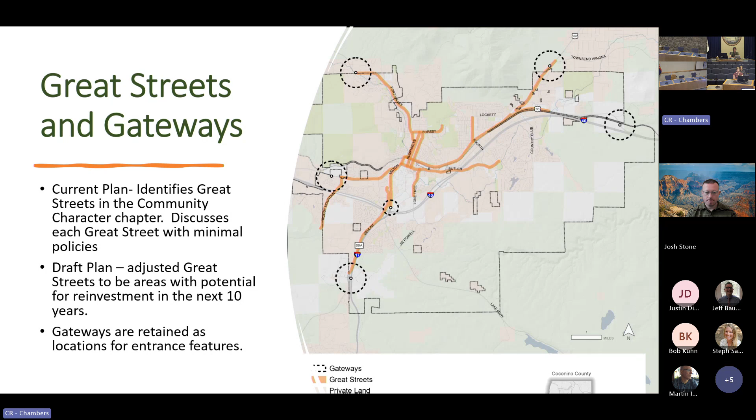When it applies to development cases, that's when not only does the work of transportation staff rely on the TIA, but discretionary decisions like rezonings and annexations can also include a look at the future growth of the road network and ask, are you meeting our connectivity expectations? Are you realigning roads, or at least meeting at a minimum what we're looking for going forward? We don't hold future route planning to the exact line, but to trying to get connectivity in a network similar enough that meets the same level of function.

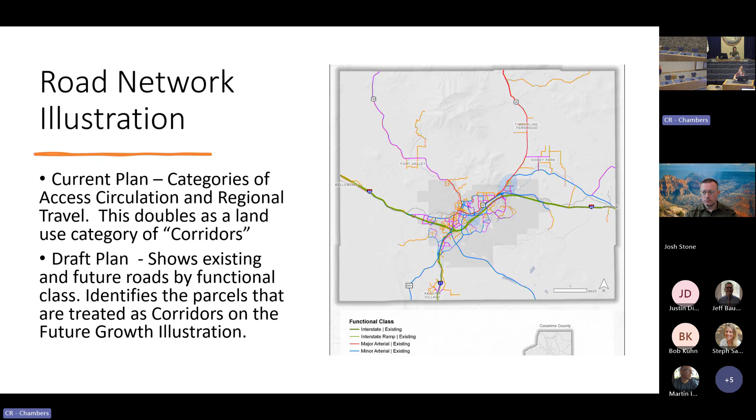So looking at the draft plan for future use, how is future land use and changes in volumes or use of streets accounted for in the plan? We did what we call exploratory scenario planning. Our future growth illustration is based on what we called scenario E, and there was modeling associated with all of our scenarios.

The scenarios, we don't go back and model this whole map because it doesn't all come online at once. It'll come online at different times and different places. But we did model a scenario where we took the amount of expected growth between now and 2045 and applied it in a rough way to the map, testing what if it grows like this, or like this. We tested where we would get the most return, especially on vehicle miles traveled. That was a real consideration on the land use side, is which of those scenarios helped us meet our active transportation goals, reduce VMT for the carbon neutrality plan, and also support shorter commute times.

One thing we found in exploratory scenario planning is if we kept developing the way we have been, and not allowing for more infill development, we would continue to push people to longer and longer commutes outside of the region, a trend we've already seen get started. People are buying homes in Williams and Winslow and then commuting into Flagstaff, which was not a common situation 10 or 15 years ago. That trend could continue to the point where over 50% of our workforce is in-commuting, if we are not thoughtful about the land use practices within the city limits.

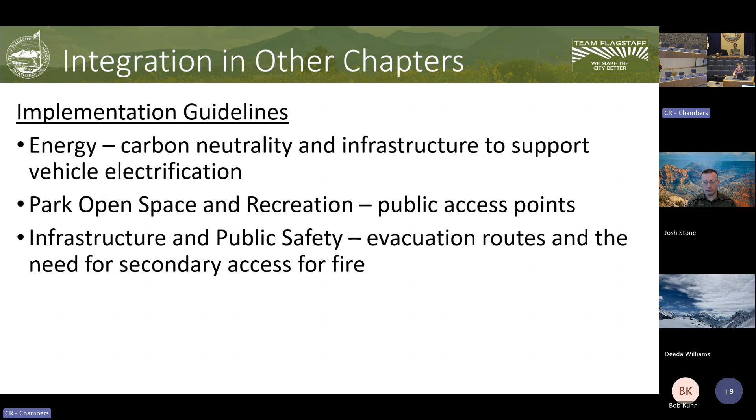So what's going to happen during the 60-day review? The 60-day review is going to have these opportunities for public engagement. That's all going to get wrapped up in December. And then staff will be analyzing and incorporating the public comments and the feedback we've gotten from testing that we're hoping to do with several different departments.

We'll have the opportunity to reconvene the committee if there are complex issues, but we also might elect to bring those back to commissions if it's not integrated across many different topics. If it's really just a transportation issue, we might be back in January or February with an issue we'd like your help resolving.

Legal is going to have to complete another final legal review, because certainly we wouldn't accept public comments if we weren't willing to make some changes. So that's part of this process.

And then the document goes to a retreat of the Board of Supervisors, City Council, and the Planning and Zoning Commissioners from the city and county. This is what often gets called the citizen review session.

But the plan is so big and so comprehensive that in the past they would have 12 or 13 work sessions in a row, and that's a big time commitment. It's also a hard way to look at the document—if you're not sitting down and really looking at it in a short period of time, people kind of lose the thread. The chapter by chapter reviews were sometimes difficult for the committee, and they were much more concise when we did the whole document review. We were able to get through that pretty quickly.

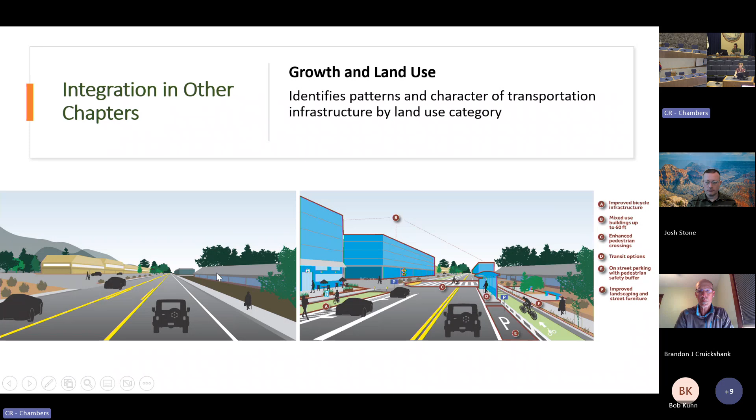Okay, I'm not hearing any. So I guess, Sarah, what would you like from us? Just specific comments? Do you want us to more formally review the plan in more detail, or?

I think what we'd like you to do is review the plan in detail when it's sent out on October 20th. As a commission, previously when we came around, I said don't come up with a formal commission comment, just give me your individual comments. But this is actually the time to come up with a formal commission comment. So it would be advisable if you wanted to see me back in December, or agendize it for your next meeting, to put together a commission-approved comment to send in. We'll ask the same of the bike advisory and the pedestrian advisory committee.

That sounds pretty reasonable to add that to our next agenda in December. Does that sound good to everybody else? We'll try to make a note to remind everybody a couple weeks ahead of time to actually read through the document, so we're not all trying to plow through it on Tuesday evening. I'll ask Jeff to send out our notice when we send out the 60-day review start. Yeah, that'd be great, and a mid-November reminder. Thank you, Jeff.

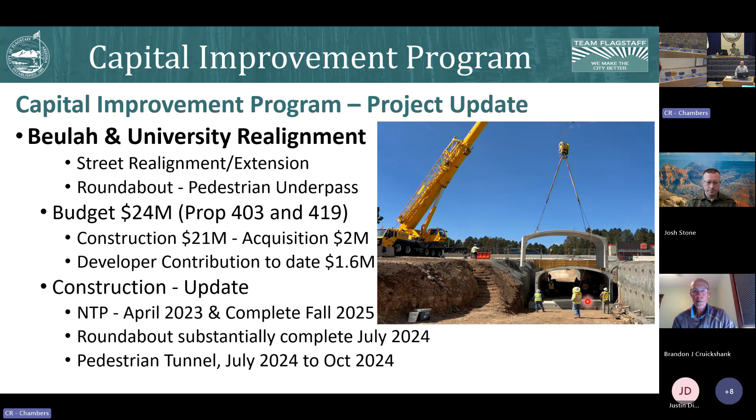Then the roundabout on the west side, which we call phase 1, is substantially complete as of July. They're still working on some landscaping, minor improvements, and upgrades to get it ready. But right now there's no traffic on that road until they get everything complete, and towards next summer is when they should start looking at opening that portion on the west side. So that's Beulah University. As always, if you have a question, raise your hand or stop me and we can talk about it.

The next project is John Wesley Powell. This again is out of Proposition 419. It's an extension of a road from the Butler and 4th intersection going south, then connecting to where it currently ends by Pine Canyon subdivision.

This project is a joint venture, or a shared responsibility. 60% is on the property owners in the area and then 40% is for the city. We've talked about 45 million, but that's an estimate from a while back, and we're moving into a design process.

We're currently working on the design. We'll probably keep working on that through the early parts of next year, and then maybe some construction later next year, and possibly going for 2 more seasons after that.

The good thing is on October 8th, next Tuesday, we will have a council update, so the team will be in front of the council to give an update on this project. One thing I failed to mention is on the Beulah University project, we will also be in front of council on the 8th for an update, so you'll get more in-depth information from the team for both of these projects.

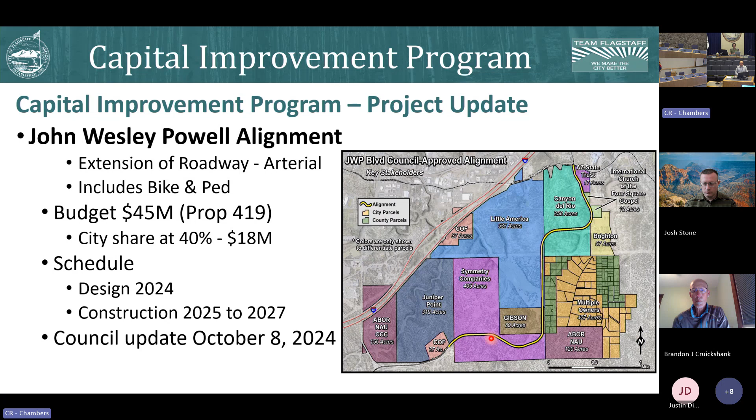Downtown Mile. This project is essentially about a mile in the downtown section, real close to the railroad section. As you know, our partners are the BNSF Railway Company as well as ADOT, so we're doing a lot of work there.

We have a budget of about 56 million, and we've had some grants in place that have been awarded, so we're moving this project forward. Some of our partners are also providing funding to this project.

The update I have for you is we are at a 60% level design. We have sent out comments to our partners, and we're just waiting on comments to come back on the 60% level, and then we will continue to move this project forward.

We are also going to be looking into doing a construction manager at risk for this project. We're hoping to get that going soon, then maybe early parts of next year, the spring or early summer, we can have a CMAR relatively close to being on board, and we'll keep moving forward to get portions of this project completed in 2025 and then the next 2 years after that.

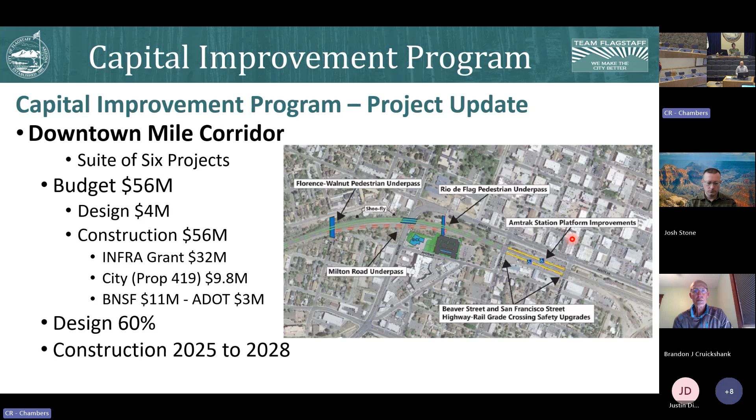As you can see from the picture, there's essentially 6 portions of this project, different phases: the Florence Walnut pedestrian underpass, the Rio de Flag pedestrian underpass, a shoo-fly, the Milton Road Bridge, and also some at-grade improvements with the railroad at Beaver and San Francisco, as well as the Amtrak station platform improvements. A great project moving forward, and we're excited for this one to continue on.

Lone Tree Overpass. The actual overpass is Proposition 420, but what we've done is coupled portions of Proposition 419 with this, so we do this jointly together. There's an overpass portion, shown here in purple/blue, and then the red going south is the corridor, which is 419. There's also a portion of Route 66 that we're going to do here, which is also added.

So this entire project is a corridor, it's an overpass, there's protected intersections at Butler and Lone Tree, at Franklin and Lone Tree, and then Sawmill and Lone Tree. There's also going to be bike facilities and ped facilities along this corridor.

Currently, we are at 100% design, and we are going to start moving into some type of construction. On September 3rd, the council meeting, we presented for their consideration GMP number 2, which was 25 million, providing construction from essentially the south abutment of the overpass all the way down to O'Leary. That should be starting in the early parts of 2025.

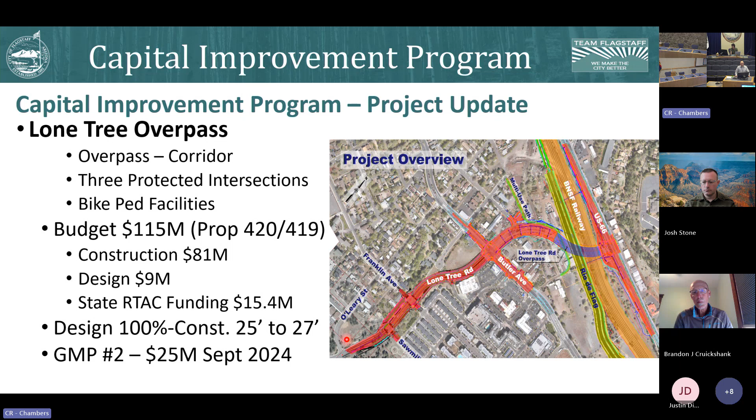We've been talking with the contractor. They're just trying to get all their subs in order and get everybody coordinated, and it seems like we're going to run into winter soon, so our best guess right now is to start next spring. That'll be in 2025, and it'll continue for 3 seasons.

Butler Avenue Complete Streets. When I came before you last time, we called this the Butler Avenue bike lanes and protected intersections, but we've changed this project's title to Butler Avenue Complete Streets. Again, it's a grade-separated bike facility with protected intersections, from Milton Road all the way down to the very east side of Aspen Sawmill, the complex or development there. We have a budget of about 12 million, and it's coming out of 419.

We applied for and received a Safe Streets for All grant in the amount of 9.6 million, and the city had a match of 2.4 million. Earlier this summer, staff submitted an application to the Arizona SMART Grant Fund from the state level, and that was approved at 2.4 million. So the city's portion is now funded by the Arizona SMART grant, and I believe Councilmember McCarthy was there to support us on this effort, so we thank him for doing that.

Did you want to say anything, Councilman? Well, yes, I represented the city at a state transportation board meeting. We also had people there from Metro Plan and some other people from the city, and we got to 2.4. So this project is completely funded, and the city's match portion goes back into Proposition 419, and we'll use that accordingly and as needed.

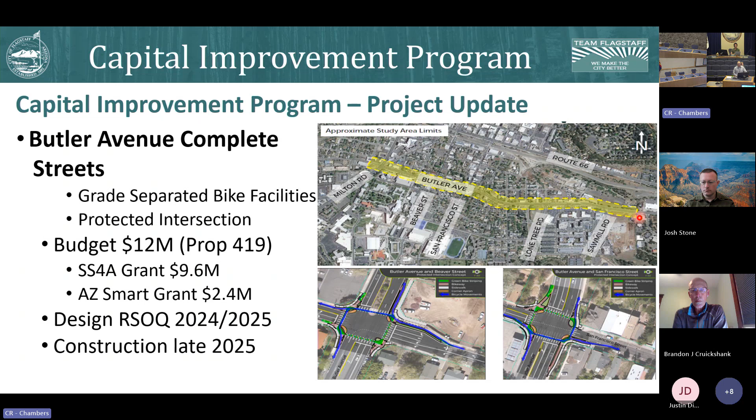Butler Fourth improvements. This is east of I-40 at Butler Avenue, right in front of Little America Mobile, going all the way down past the intersection of Butler and Fourth, to Sinagua Heights, the very west end of that subdivision. This is a complete street. As you can see in the picture, we're going to have 2 lanes in both directions with a median, with pedestrian and bike facilities on the outside. We're also going to do some underground improvements for storm drain, water, and sewer as needed.

Right now our budget is approximately 18 million. We did go through a RAISE grant submittal, an application earlier this year, and we found out around May that we were not successful. But we went through a debrief with the Federal Highway Administration on our grant submittal, and we are going to be eligible for the second round of the RAISE grant. So we will be doing that at the first part of next year, in January. We'll be back in the mix for a RAISE grant.

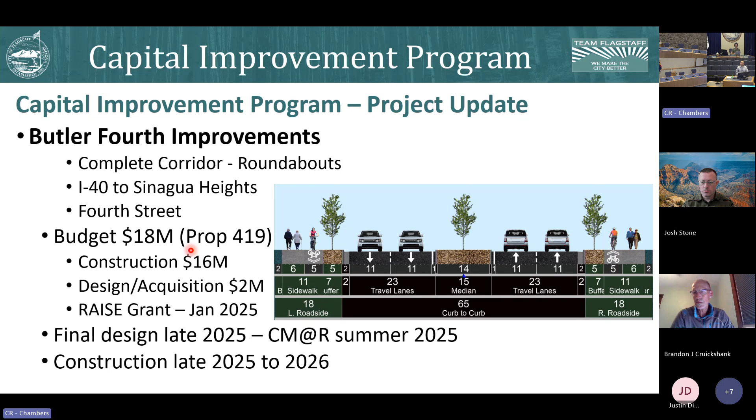Lockett Cedar Fourth roundabout. This is a highway safety improvement project through that program. We are working with ADOT, who will administer this project. It's a modernized roundabout in this intersection, with lanes coming in and lanes going out, as shown on the slide. We worked quite a bit with our designers and staff to get this to the final configuration.

We've had a lot of discussions at the city council about PED crossings and beacons and Z crossings, and Councilmember McCarthy was very instrumental in getting the Z crossings added to this project. Right now we have a budget of about 6 million, and the city share is 4 million, which has already been sent over to ADOT. They have it in their coffers.

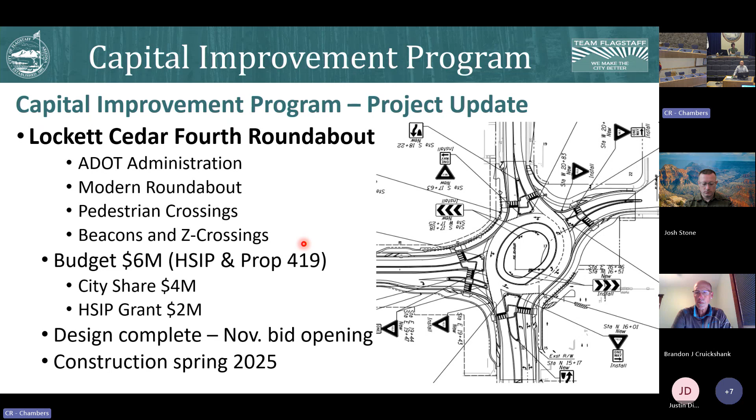They're ready to administer the construction portion of it. Right now it's out on solicitation. The bid will close at the end of October, and we'll know in the beginning of November who our contractor will be. We'll be talking with ADOT and getting coordinated. We'll have our own project manager on board to help deliver this project with ADOT. Construction will start next spring, and we expect it to be a one-season project.

Switzer Canyon Trail. This is part of the FUTS master program, or master plan, and has been on the books for a little bit. We've gone through one alternate delivery method, which is a JOC. It came in a little high, so we decided to redesign. We're going through that right now, working on it, and expect to be complete with that redesign effort in a couple weeks.

Then we'll get that out for bid solicitation through the winter, open bids, and be in front of council for approval. Construction will start in the spring of 2025.

We do have a budget of 3.25 million, and that was actually raised or revised to reflect what we did earlier with the JOC, the alternate delivery method, to ensure we have enough funds to cover this project for construction. Construction will be most of 2025.

Have you guys figured out the connection to Cherry, or whether you can connect it down to 66 at that end? Mr. Chair, that portion of the project, that scope, is not part of this project currently, but we are aware there is a need for that, and it may be coupled with the Lone Tree Overpass, or it might be a project on its own. But that portion connecting to Route 66 is not part of this project, though we are aware of it. Thank you.

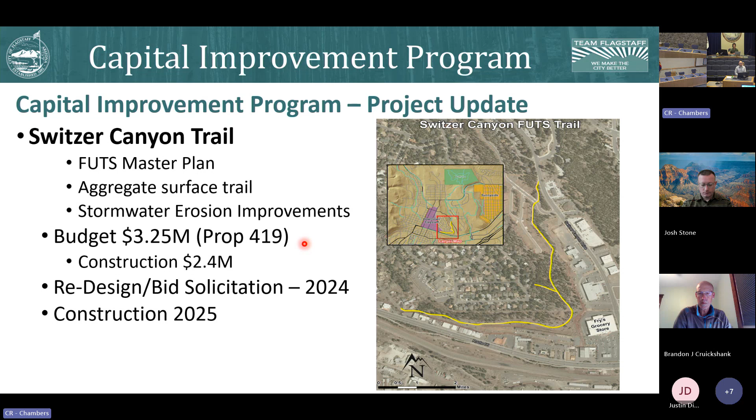We're going to analyze and see what we need to do there. We'll also have some bike and ped improvements. There is a FUTS trail to the north that stops near FAC, and we're going to look into maybe extending that further south to connect into this intersection. So those are the scope of the project.

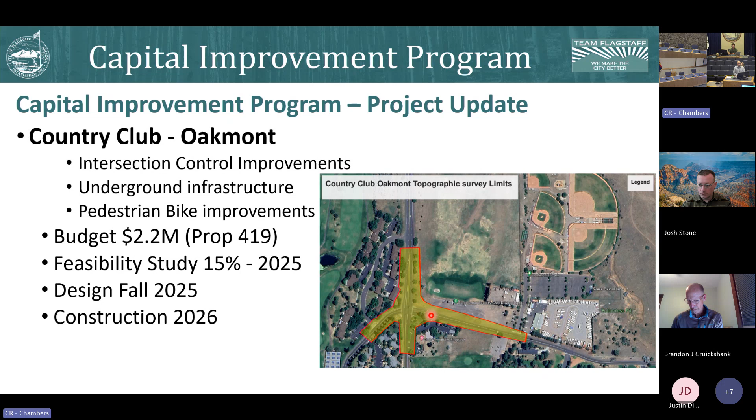Our budget is 2.2 million, coming out of 419. Right now we're going to move it forward with a 15% feasibility study, which we hope to have completed by the summer of next year. Based on that feasibility study, we can start looking at design, which will begin next fall and maybe go through the early parts of 2026. Then for the construction season of 2026, we can begin. This is a new project, and we're excited to be working on it with our capital improvements staff internally.

Boulder Point Traffic Calming. This project developed from discussions and, I believe, public neighborhood comments to the Transportation Commission. So this project is traffic calming and pedestrian improvements in Boulder Point. And then we also added to this project improvements in the Brandon Homes area, more specifically off of Woodland Drive and

Trails of the Wood, Trails of the Wind section. Mr. David Lemcke was our project manager. He is with the transportation section, but he stepped in and helped us out in capital improvements to deliver this project, and we were very excited, it was an enjoyment working with him and getting him up to speed on what we do in capital improvements. So thank you, David. Notice to proceed was in June of this year, and then August 29th it was completed and accepted. So this project is complete.

Smokerise and Highway 89. This is a signal and traffic management project out of 419. This is going to rebuild the signal at Highway 89 and Smokerise. There will be some new improvements to the signal at all 4 legs, some pedestrian improvements, crossing, ramp improvements, as well as median improvements. Currently the medians are a little wide, so when 2 vehicles come together they can't quite see past each other. We're going to do some improvements to those medians to ensure they can offset a little more so they can see each other or see past the cars that are coming.

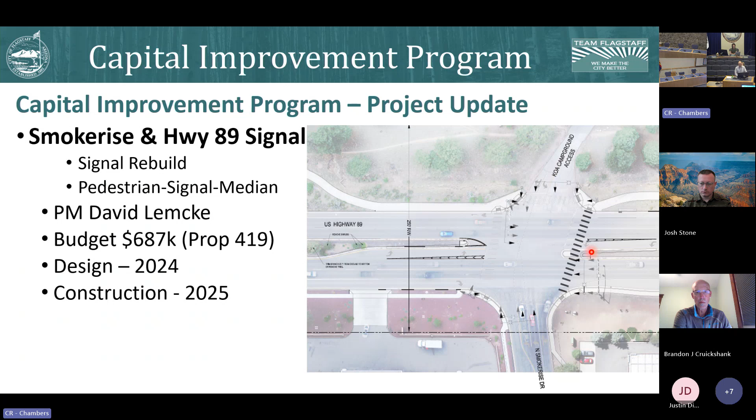And then grant projects. So we do have some grants. That's kind of been the flavor of what we're doing these days, the first part of this year is looking into grants, funding mechanisms for city projects. With the program, we have Safe Routes to School, we have a master plan for Safe Streets for All and Vision Zero, as well as the first mile and last mile. These are projects that were identified out of the CIP for streets and transportation, and a lot of these projects are moving forward.

We have a solicitation in progress for the Safe Routes to School. It is a transportation alternative grant. We had a pre-proposal meeting yesterday, and we're going to have a bid opening on October 15th, so we'll see who's going to help us deliver that project. That is also in coordination and association with MetroPlan. The master plan for the Safe Streets for All, again, is also with MetroPlan, so we're working with our partners on those 2 grants.

First mile, last mile, we are working with Mountain Line. They received the grant for these improvements, and it's currently in design, and we'll continue to move that forward. We have a construction manager at risk on board, Kinney Construction Services, a local firm. We'll continue to move that, and then we'll maybe have some construction elements, some bundled projects starting next year, and then possibly for the next 2 seasons after that.

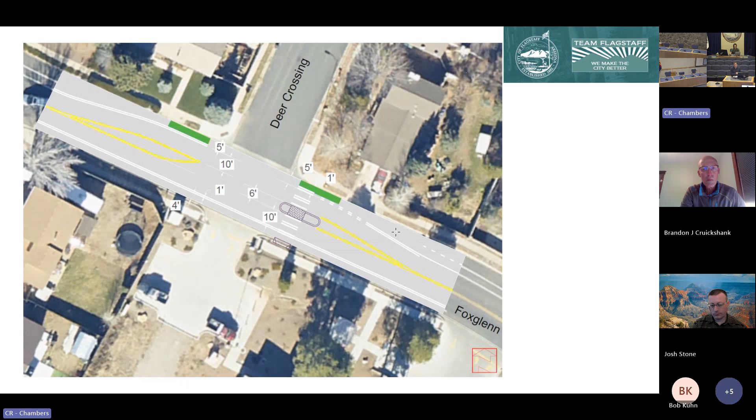Can you clarify what that refuge island is - is that an elevated chunk of concrete, or is that just paint on the road? What would that experience be like? Yes, it would be an elevated concrete structure similar to the island. There's one on Sparrow, I believe, near Northland Prep Academy, that would be similar, and I believe we have similar ones on 4th Street. Exactly what it will look like is still open to interpretation - we haven't gotten far enough in the design to know exactly what the curbs will look like, whether we use rolled curb or vertical curb. We lean more towards rolled curb because of the snow operations, but yes, it would be a 6-inch curb.

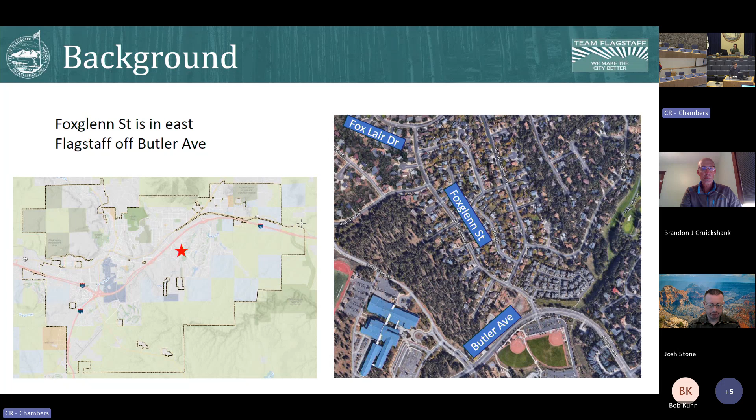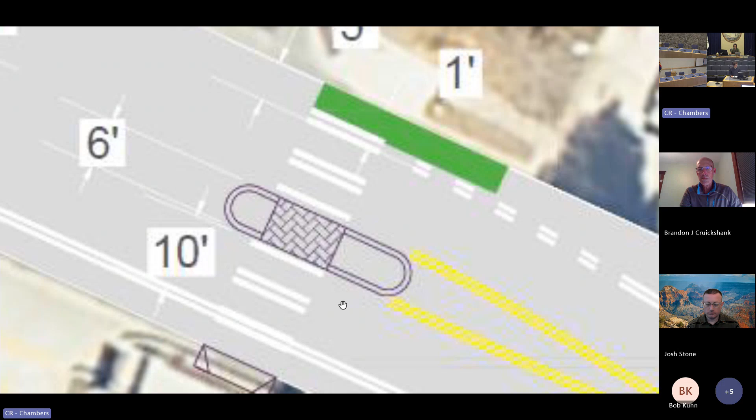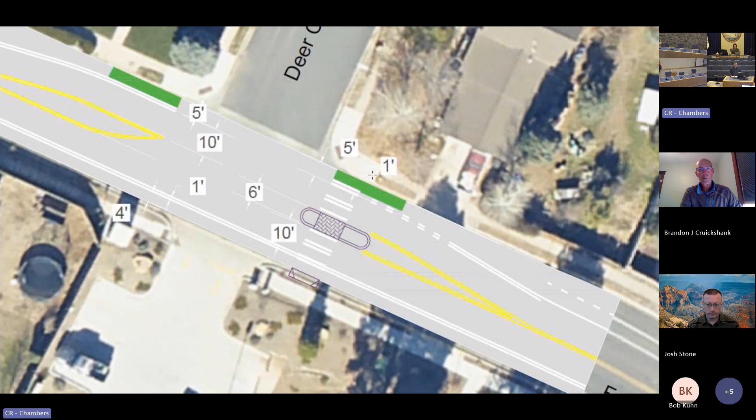Yes, and of course we would also be doing the curb cut. On the south portion we'd have to put in a brand new curb cut, but at the north portion, our plan is to retrofit it with the current ADA ramp, because I believe that one is newer and had been put in recently, and we would want to avoid demolishing that and try to make it work with the design as much as we could.

One other consideration: about once a year or so, the water basically floods the entire street. So I'm assuming there's going to be some signposts on that curb as well, just so that if it's flooded, somebody doesn't just drive right into the curb. Yes, at the curbs there would be a pedestrian crossing sign with an arrow.

David, are there any thoughts to putting prominent crosswalk markings on Deer Crossing? I'd assume some people will cross from north to south on that road before taking the pedestrian crosswalk across Foxglenn, because right now it looks like there's no crosswalk on Deer Crossing. That's definitely something we can consider. We typically try to reserve crosswalks for where they're most needed, and I understand people crossing at this bottom one could also be crossing to the north, but we're comfortable without putting one there because the vehicle traffic is less. It is something we could consider.

Thank you. So what would this plan look like? You're going to email us out for public comment, to the immediate neighbors, I think within 100 feet or so, so it's just going to be about 4 houses.

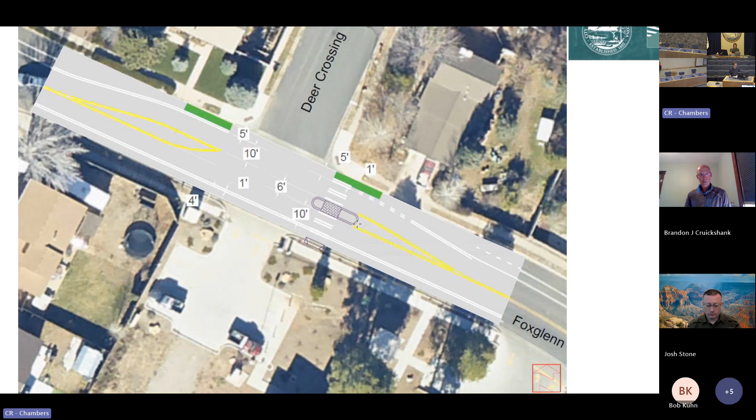This is still kind of new for us as far as how we get this out to the neighborhood. We might extend it for the whole section of Foxglenn. I'd have to look at the guide again to see exactly the language, whether it's reserved just to the houses immediately adjacent or if we do the whole area for approval.

I think it would lean more towards the ones that are immediately adjacent. We would ask them what they thought, because they'd be the ones most affected, especially the people losing the parking. Then based on that, if approved, I believe we need around 60% approval, and then we would go forward with construction.

And this design, or this invitation to the meeting tonight, was sent out to the whole neighborhood? It was, yes. All the emails we got from the survey, we sent it out to them last week. We tried to reach out to as many people as we could, but we didn't get as much participation as we would have liked, so we broadly spread the message for this meeting to come and talk about this.

And the way the residential neighborhood traffic management program works is the folks that are immediately adjacent have the ability to agree or disagree with the project, since they're so impacted, potentially being right adjacent to it.

Okay, yeah, full disclosure, I live on Foxglenn, like a block north of this. And I've been out of town, so I haven't gotten through all my emails yet, but I didn't see an email about it. I know there are a lot of passionate people, so I'm surprised nobody would have showed up. I heard from some neighbors who just had other things going on today, and I told them I'd give them a summary of what we learned tonight. But yes, I'm also surprised we didn't have more of a turnout.

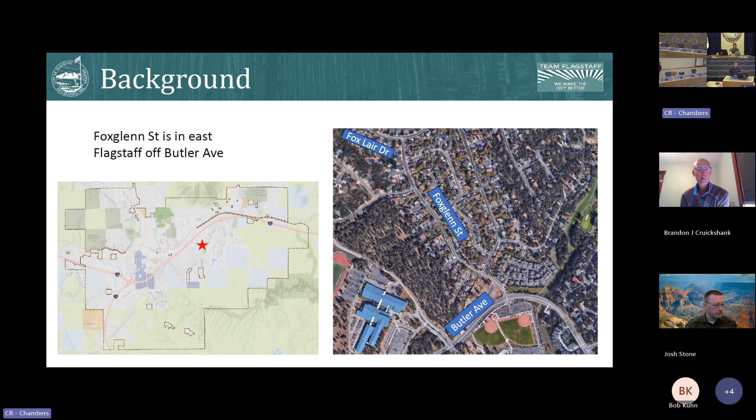With that, I suppose I'll turn it back to you, Mr. Chair. Do we go to public comment now? Do we have any public people here? We had a couple, but I think they've all dropped off. Okay, so not hearing any public comment. Any further comments from commissioners? Not hearing any. Thanks for the presentation, David.

You're back. I'm back. Yes, I couldn't help myself. New guy. So thank you, Chair Koenig and Transportation Commission for this second opportunity. Now we're going to wrap things up. I know it's been a pretty action-packed meeting with the crash report. Let me go to presentation mode.

All right, so today we're going to be talking about the crash report. You should have gotten a copy in the email from Jeff. I'm going to go over some high-level information from the report and take you through what we learned. This is the third crash report created by the city, our annual report each year. I think it gets better and we learn more about what's happening within the city, and we're able to use that data to try to make changes to our infrastructure.

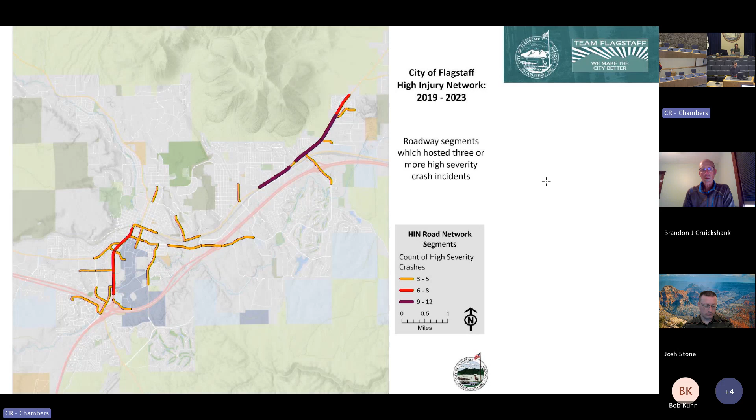So next, I want to talk about road safety assessment. This is something that was derived from the last reports from the last high injury network. It was actually at the Transportation Commission meeting that we noticed that East Route 66 and Highway 89 hosted a large amount of severe incidences, and Transportation Commission directed us to try to find a way to figure out what's going on there and address those issues.

I have to give a lot of credit to Chris because he thought that we should go for a road safety assessment on this area. At the time, ADOT had just finished one on Milton Road, and a road safety assessment is administered through ADOT - they hire a consultant to go evaluate the section of roadway to develop mitigation strategies for the city or whoever is asking for the analysis.

And we figured what better way to learn more about what's happening here and find a solution than to hire people whose job it is to do this. So Chris, supported by the rest of us, submitted for a road safety assessment through ADOT, and we were awarded it. It is ongoing and should conclude at the end of the fall season, or at least their assessment will. I don't know for sure when we'll actually get our report back that says here's what's happening and here's the recommended mitigations, but we are looking forward to getting those results.

Next thing I want to touch on is this year we did something different in the report where we went from a high level analysis of citywide data and zeroed in on specific segments that we did a more in-depth dive on to try to understand more of what's happening.